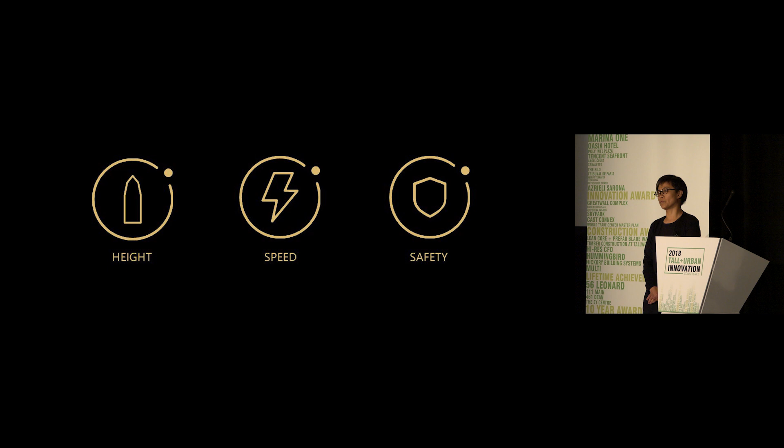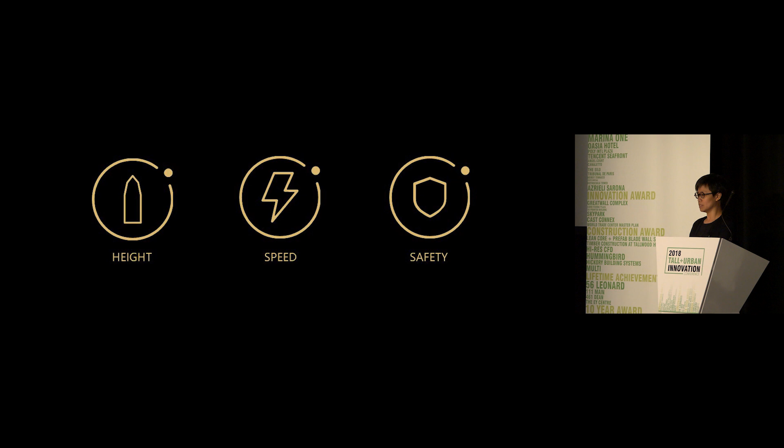Another one we would like to talk about is speed. There is this term called Shenzhen speed, which normally is associated with the economic development that happens in Shenzhen within the past 30 years. But in terms of speed here, we are also going to talk about some of the things we did to speed up the construction. And then the last one is safety.

This is the building that you are seeing today. In terms of speed, I would just want to say the speed we have talked about includes, for example, the mat foundations we are building. In fact, within 72 hours, we were able to pour in 32,000 cubic meters of concrete.

If you converted that into terracotta warriors, one of the figures in a Chinese historical tomb, that would be about 416,000 terracotta warriors worth of concrete volume.

And then lastly, in terms of speed, on average about every 4 minutes we were able to finish 1 square meter of curtain wall.

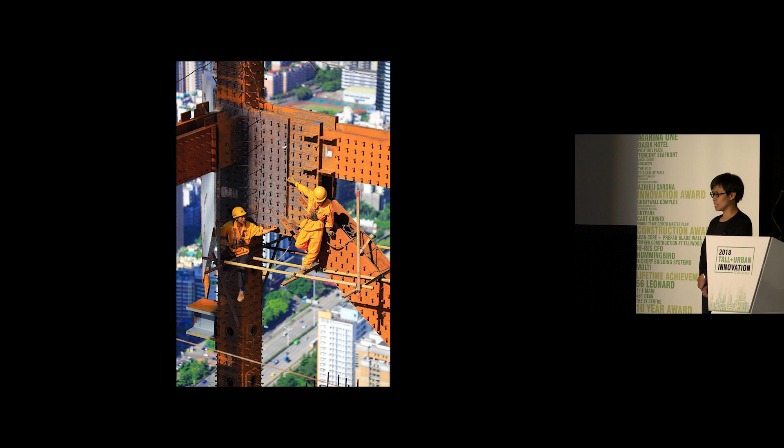Safety. A lot of people are involved in constructing a super high rise. If you go back to the history of skyscrapers, you can tell there have been a lot of fatal accidents, whether it was in the Empire State Building, the Sears Tower, or even Burj Khalifa. Fatal accidents involve human life.

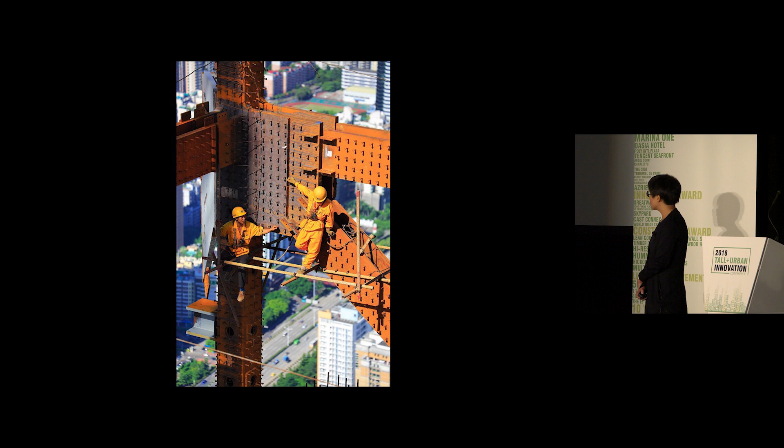At the peak of construction on the Ping An Finance Center, there were almost 3,000 workers working day in, day out on the site, day shift and night shift. But we are very proud to report we had 0 casualties over the period of a decade.

Before we start going into the details of the 3 points I just mentioned, I'll give you a summary background about the project. The project is located in Shenzhen. The site itself is 18,000 square meters, which is a very tight site for a building of this scale.

The total GFA is about 459,000 square meters. The tower itself is 599 meters in height, with a total of 115 floors above grade, and another 5 floors underground, below grade. That means we are digging into the ground to 29.5 meters.

The structure itself is a center core with 8 mega columns, diagonal mega braces, and 7 layers of belt trusses.

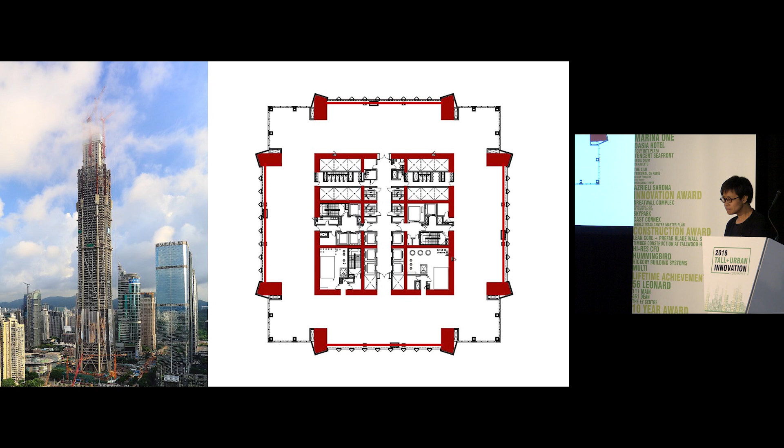And then it consists of 4 tower cranes, each about 100 tons.

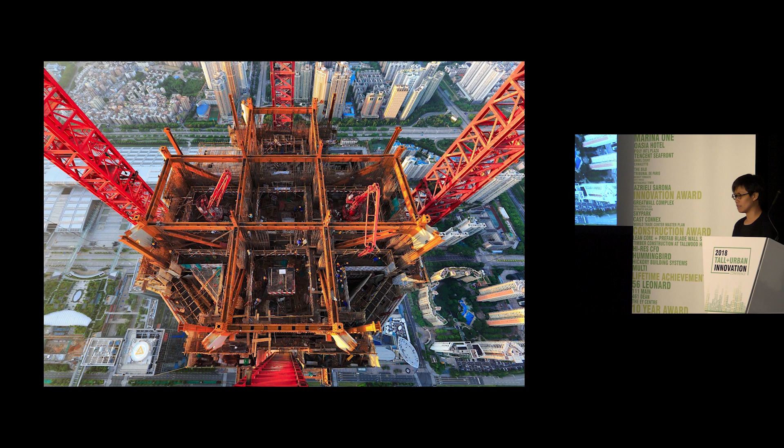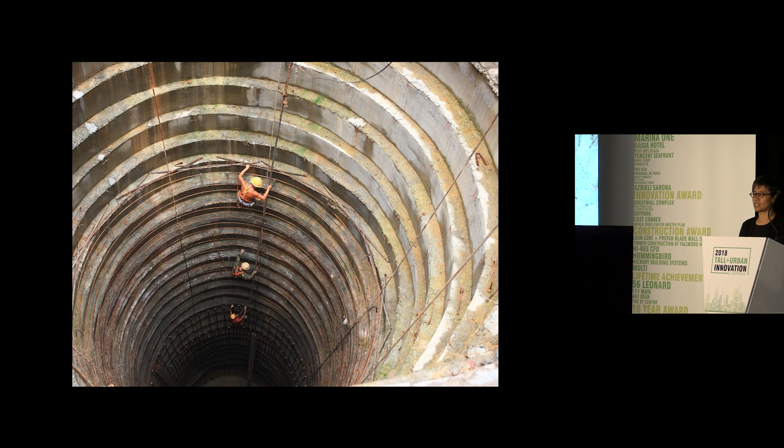Just now I was mentioning the basement itself is 29.5 meters deep. Indeed, the piles that go down further are another 35 meters deep of hand-dug caisson, which Mr. Weng is going to explain. And the diameter of the piles are 8 meters.

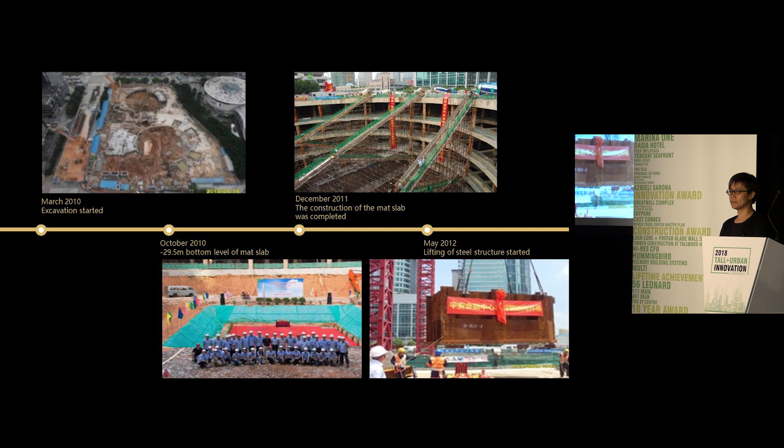Just a list of the milestones of what has happened. We started the project in 2008, and the excavation started in March 2010, followed by the mat slab foundation completed in December 2011.

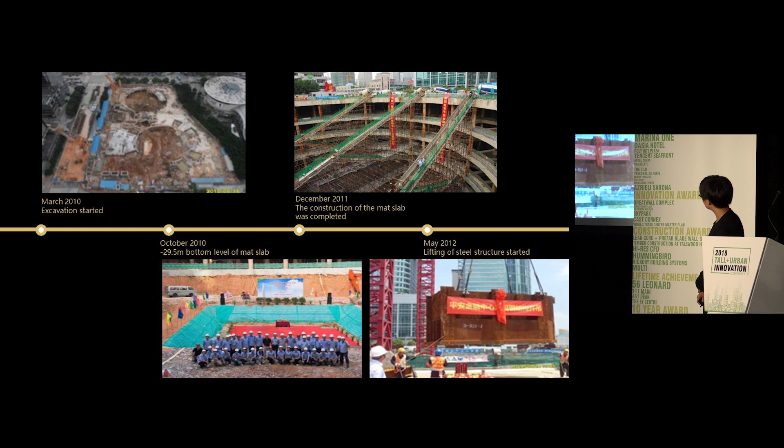2010 October, and then the steel will start building up above grade in 2012. This is a series of photos showing the sequence of where we are. The building has moved in for a year now.

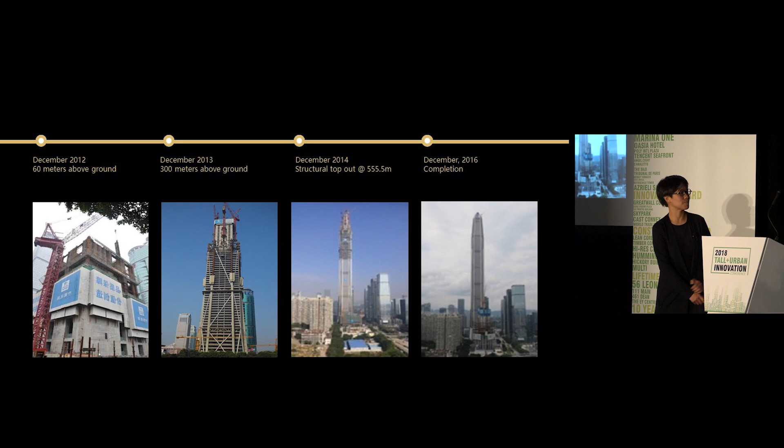So from here, I will pass the floor to Mr. Weng to explain the details of how we get the height, the speed, and also the safety.

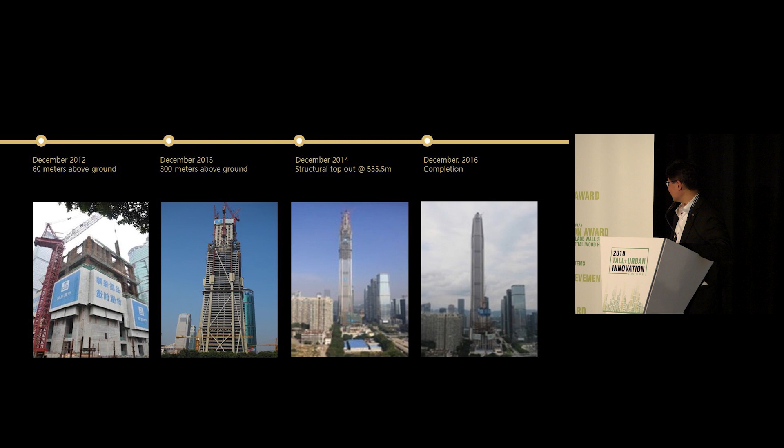The third one is safety. This section is the last, but not the least. I'm going to present the safety measures held in PAFC. Okay, let's go to the main body, otherwise it's not enough time to complete the presentation.

Height. What difficulty did we encounter from height? We know that the higher the building is, the deeper the foundation is required. The foundation was constructed between 30 meters and 60 meters below ground. So before the construction of foundation, we needed to build a protective enclosure.

The protective enclosure was a piling wall. The piling wall is common as a lateral supporting system. Its construction is also common. Why did we adjust the construction of the piling wall? It's not because of difficulty in construction, but the precaution to control its lateral deformation.

We are not talking about controlling the deformation to about 20 or 30 millimeters. We are talking about controlling the lateral deformation within 4 millimeters. Why? It is because we have one metro line and one high-speed railway adjacent to PAFC, as shown in the diagram. Both were existing.

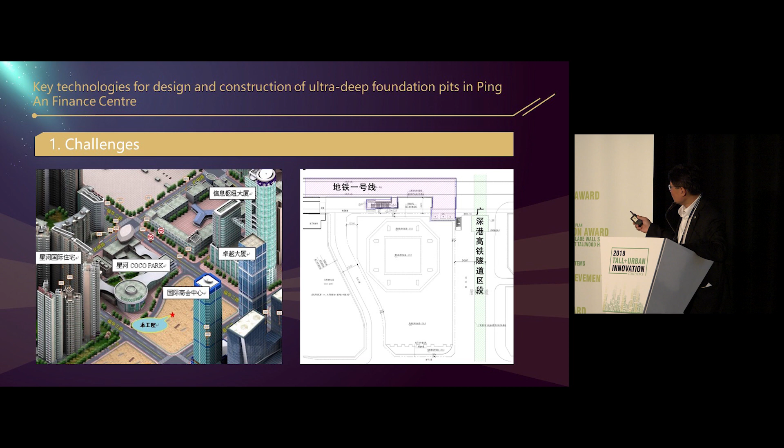One side was decided with a regular ring, the other side decided with a big opening, just like this one. Then we carried out numerical simulation to evaluate its deformation. We also carried out analysis on the pile-soil interface while soil was being removed.

Therefore, it was designed to construct bore piles with 5 layers of internal support and waterproof curtain for the northern side. The remaining sides were designed to construct bore piles with 4 layers of internal support, waterproof curtain, and 2 layers of soil anchors.

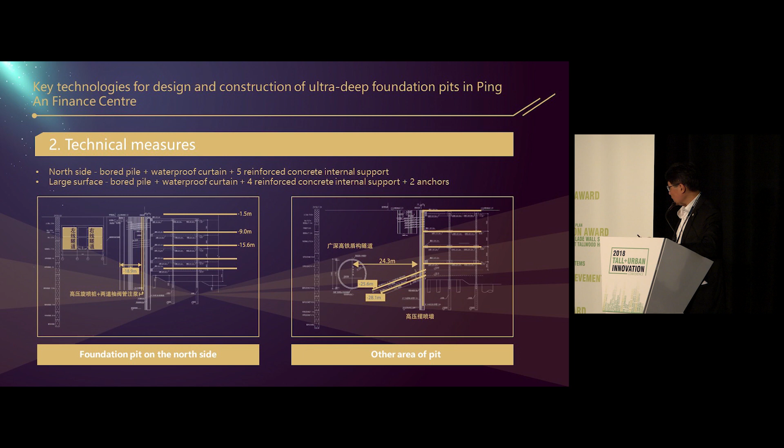This shows the construction stage of the internal support, and then what result we had: it ended up with a reduction of construction period by nearly 10%, and the lateral deformation was 2.5 millimeters, which was just 60% of the limitation mentioned before.

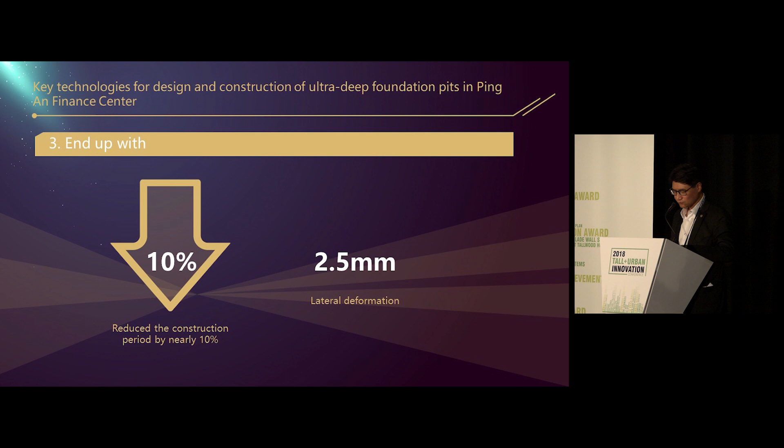Another difficulty induced from the height was hand-digging piles with a large diameter of 8 meters. We have eight numbers of 8-meter diameter piles. You can measure how big this is. Not many cases use as large a diameter as 8 meters for piles in building projects.

We prepared the piling holes by hand digging down to minus 25 meters. Then the blasting method was used to excavate the pile holes down to minus 30 meters, or even deeper to 35 meters.

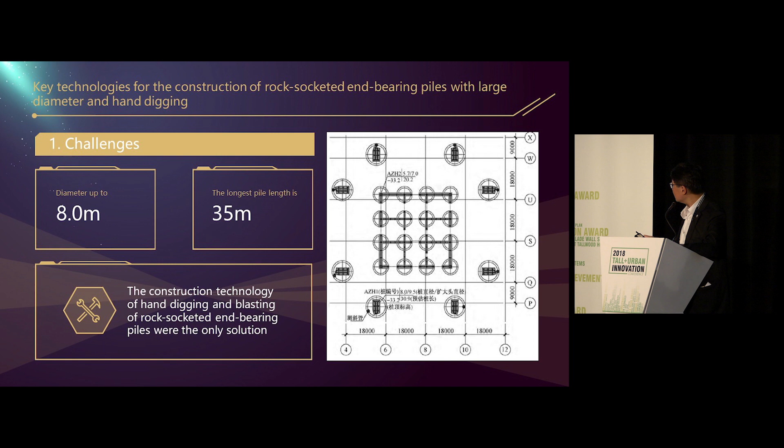In more detail, prior to excavation, it was required to stabilize the pile holes. Grouting was applied to the bedrock fissure, and then some mini piles were constructed around the casing of the hand-digging piles. Besides, it was pre-drilled before excavation, and then, as normal practice, it was excavated a further 1 meter per single day.

This picture shows each layer, 1 meter, 1 meter, 1 meter. At the end, some achievements were gained, as shown in this slide.

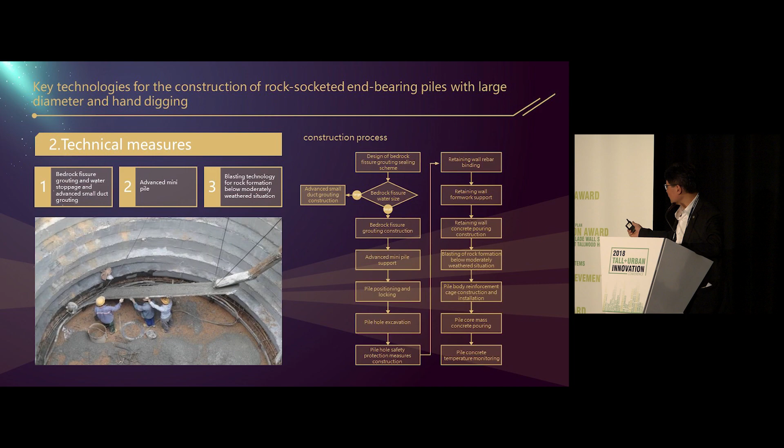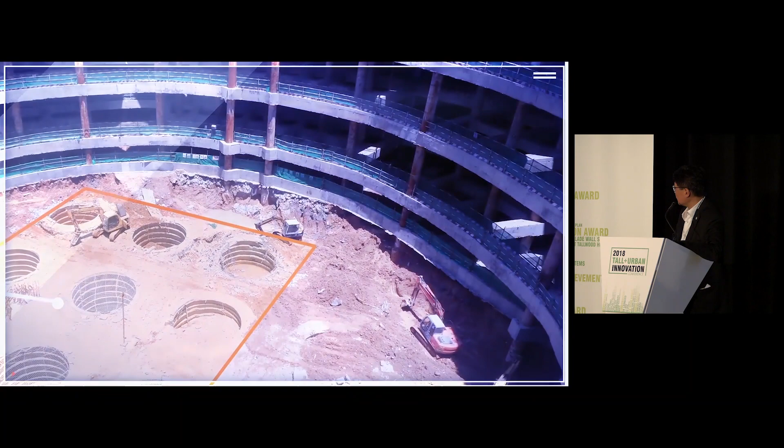This is a short video showing the excavation and the pile construction.

Another difficulty induced from the height was the construction of the mass slab. Its difficulty was because of the sizeable massive concreting technology.

Actually, what is the problem? The problem is thermal cracking, which would reduce structural integrity. So what do you think, if thermal cracks are induced everywhere in the mass slab, is it still safe?

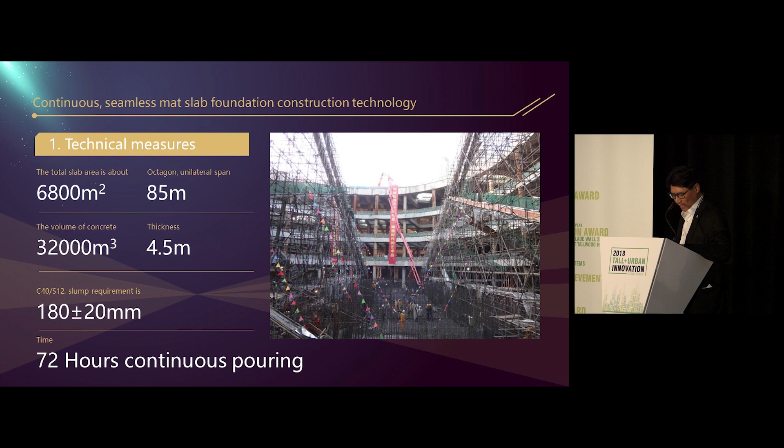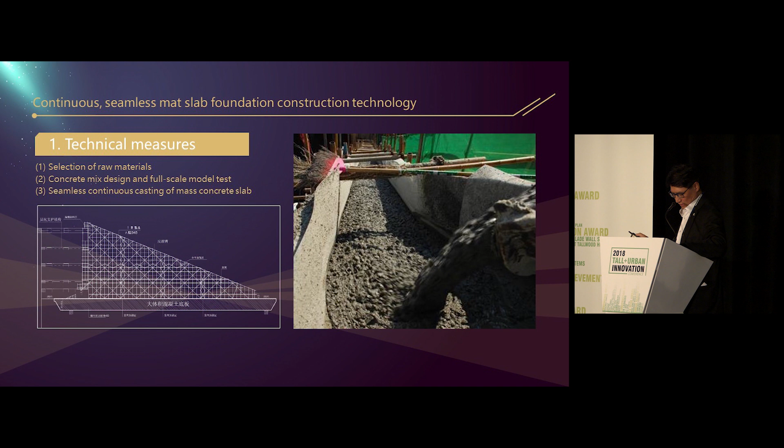At the end, the highest temperature was measured at 62.5 degrees Celsius.

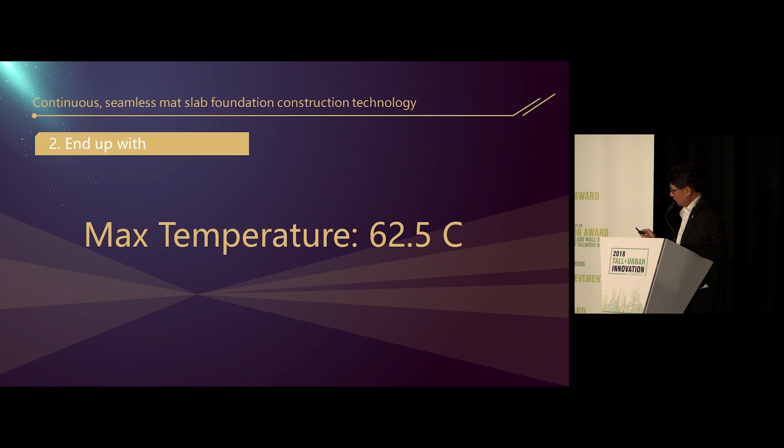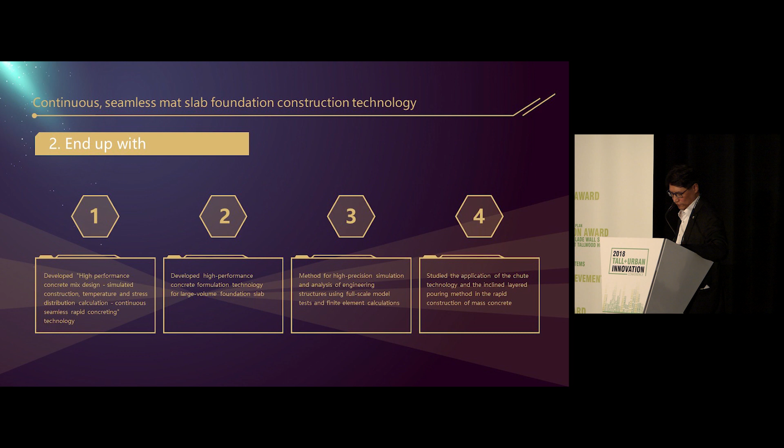Besides, some additional achievements were gained, including the development of the high-performance concrete design mix, especially for massive concreting. And then we talk about the speed.

In this point, I'm going to talk about our special structure. Since time is not enough, should I jump? This is the speed we are talking about: how to accelerate the construction speed by using the hydraulic climbing formwork system.

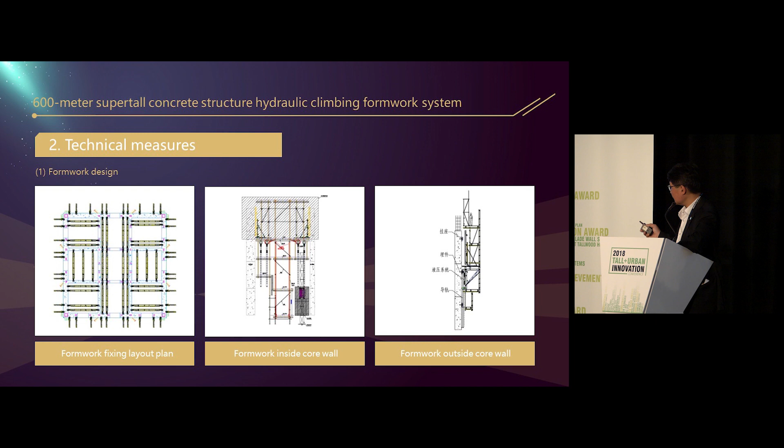This slide shows the design of the hydraulic climbing formwork system. During the design, we considered many factors, including adverse weather such as typhoons, and we need to consider the embedment in the core wall, because our core wall is complex and varies zone by zone. The core wall is actually a mega frame core wall outrigger truss lateral resistance system, so many embeds are required to fix before concreting.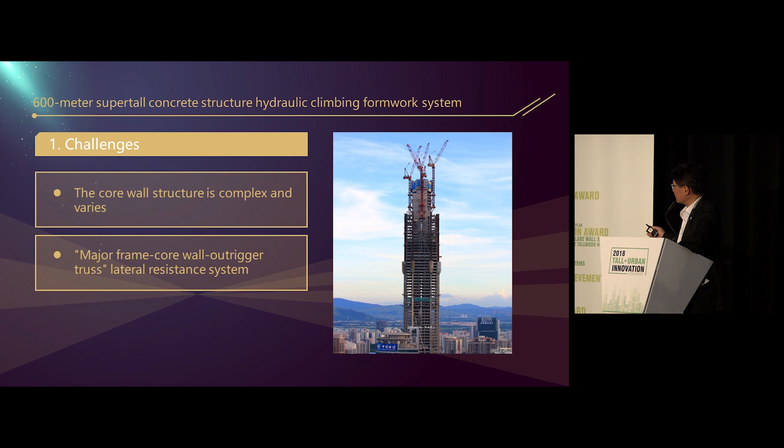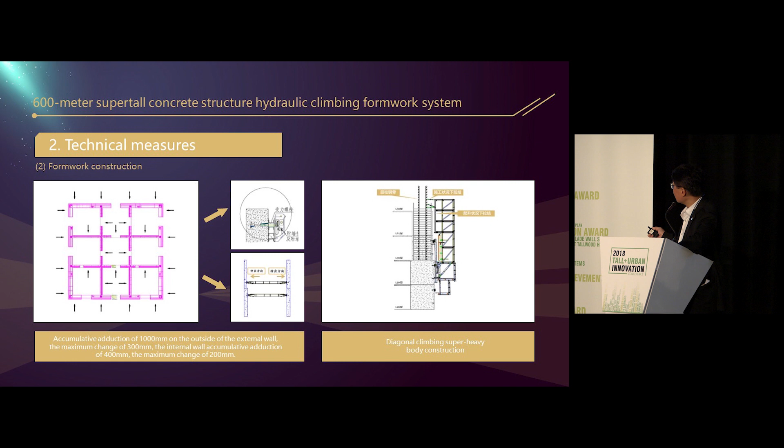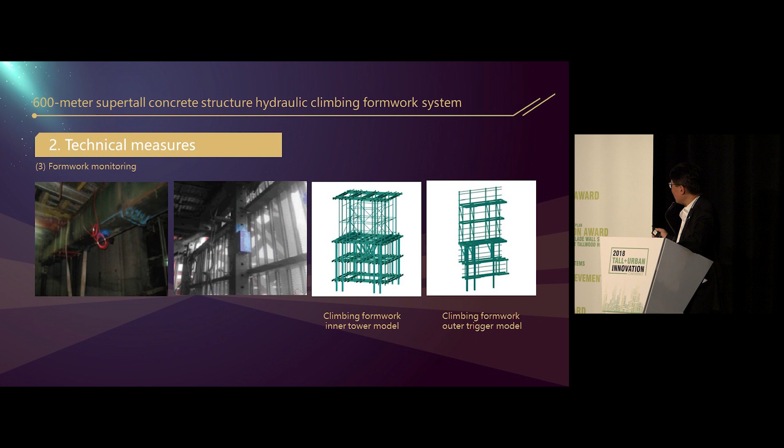This shows another diagram of the climbing formwork system, and this slide shows the in-situ fixing of the hydraulic climbing formwork. At the end, by using this system, the core wall was constructed at an average of 4 days per floor, and we achieved the highest speed at 2.5 days per floor.

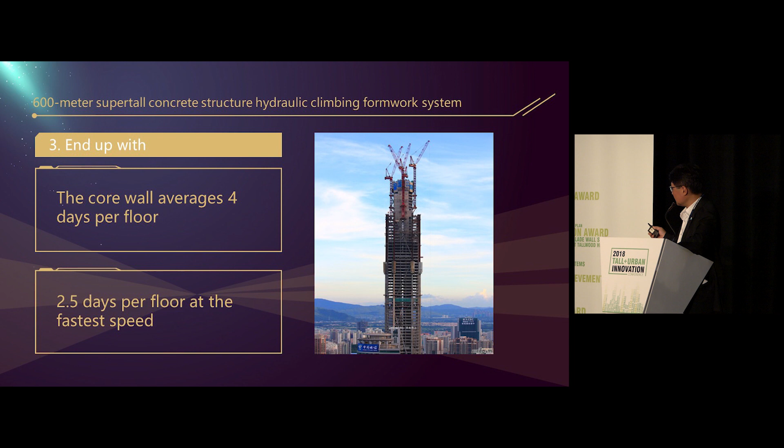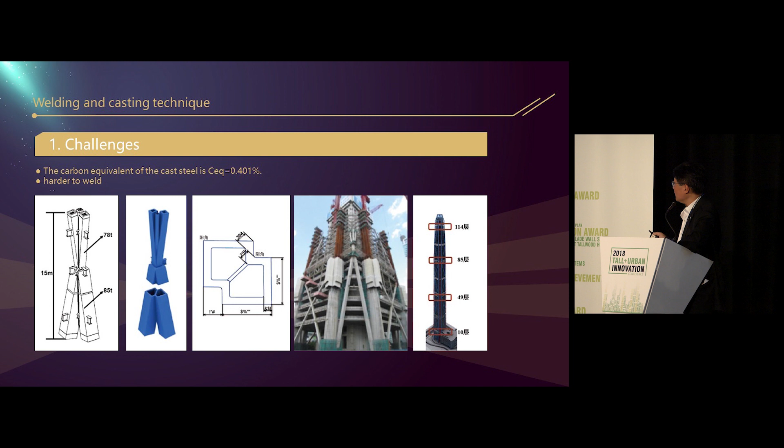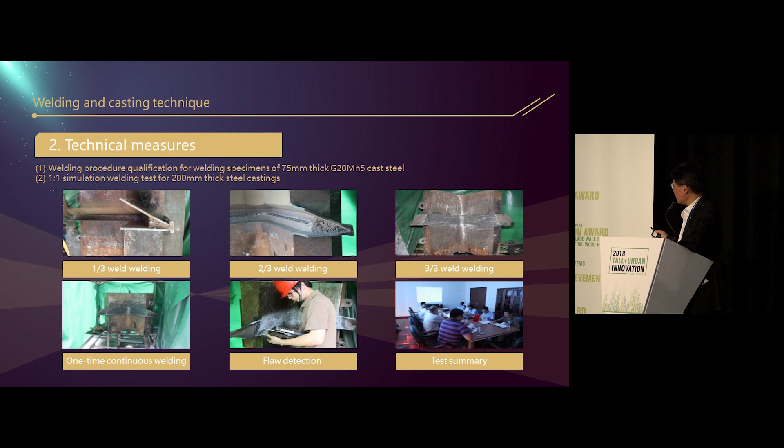This is another challenge. We used casting steel. Why do we need to talk about casting steel? Because it is quite hard to weld, and the thickness of the casting steel was over 200 millimeters, which is not really easy to control and to weld. Even the existing design code cannot tell us how to define the welding procedure and testing procedure.

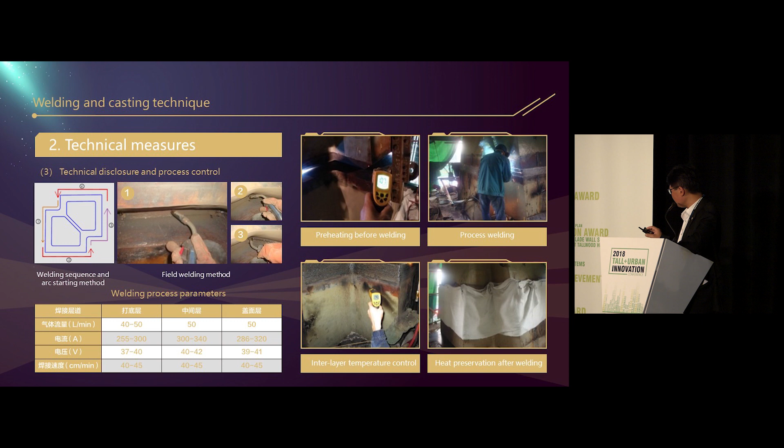So our contractor did one full-scale mock-up to test and verify the welding procedure and the testing procedure. At the end, we did the welding to the casting steel with 200 millimeter thickness, and the length of the weld was 7.5 meters, and it totally passed the first time.

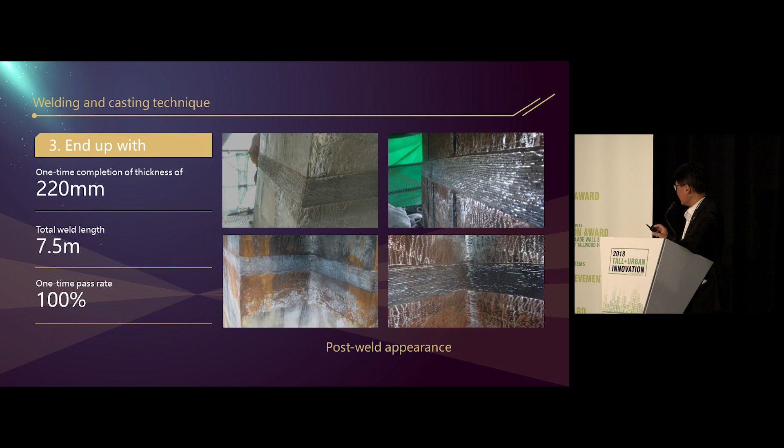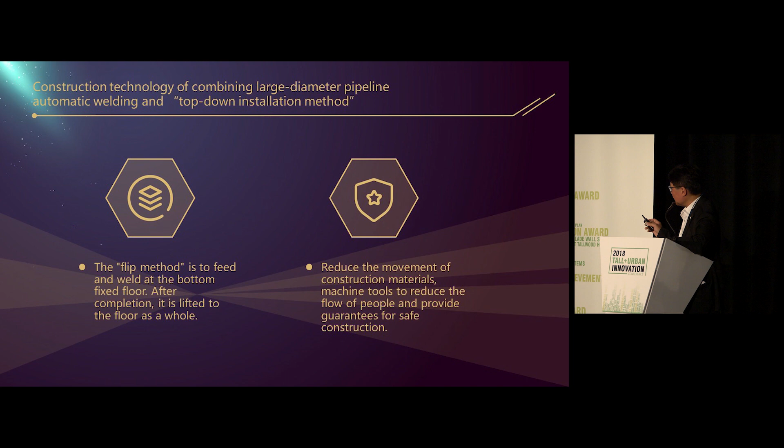This is another method to accelerate our construction, called the top-down installation method. What is the top-down installation method? I have a small video showing the top-down installation method.

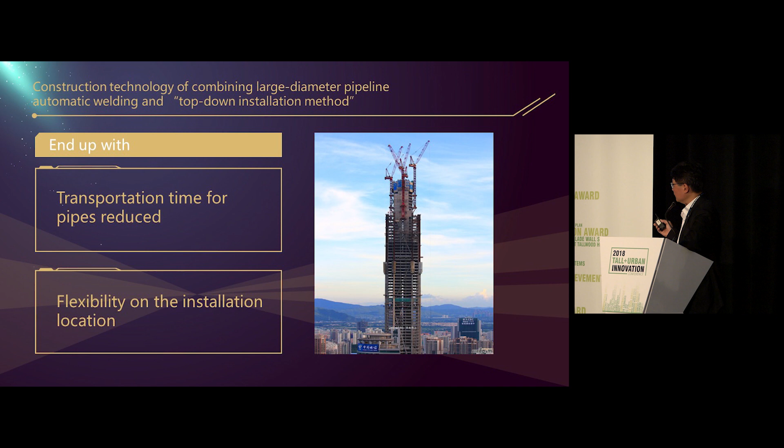This method actually saves our transportation time and allows flexibility in the installation location. What does that mean? Because we can choose a better condition location to fix the pipes.

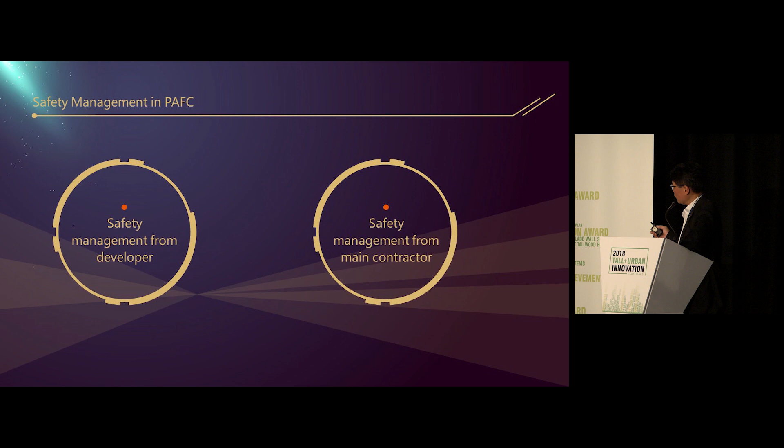Safety, this is the last section. I think I should jump to the end. Safety management in PAFC actually has two parts: one by our developer, one by the contractor.

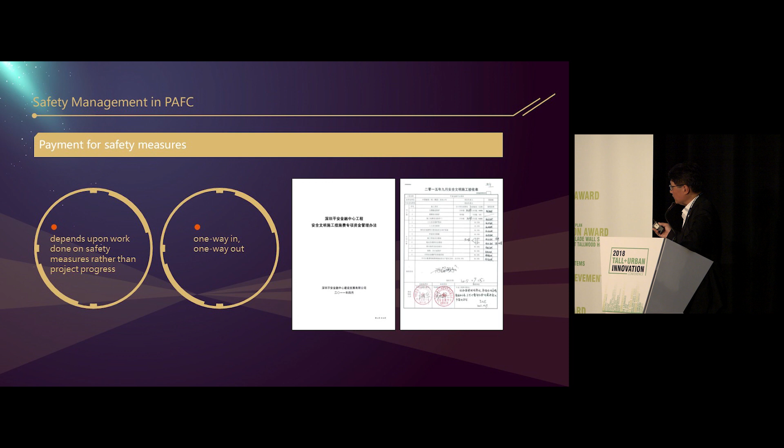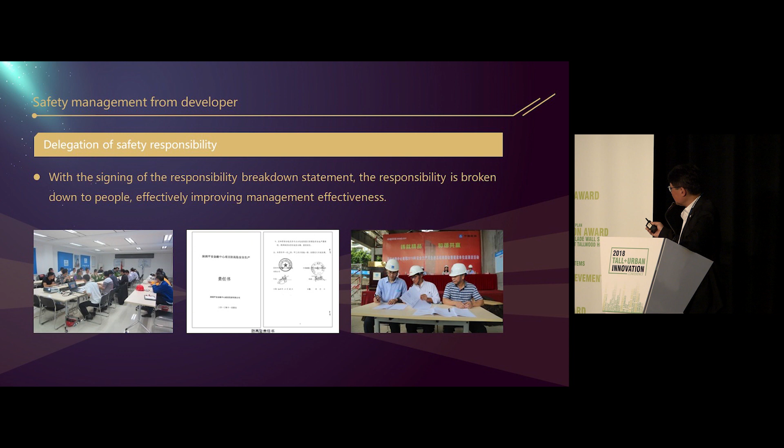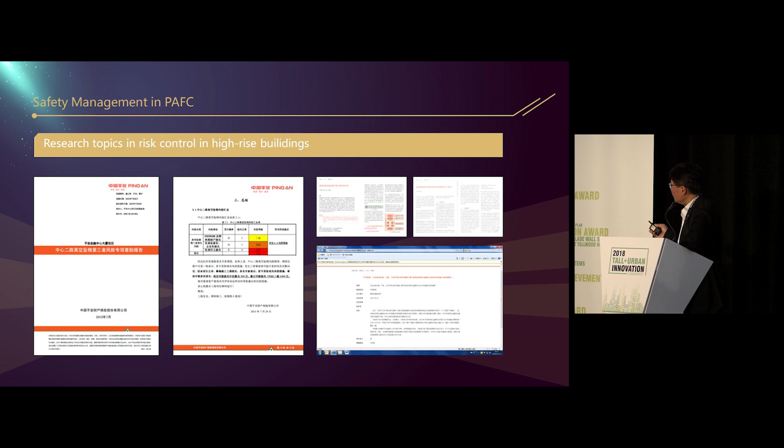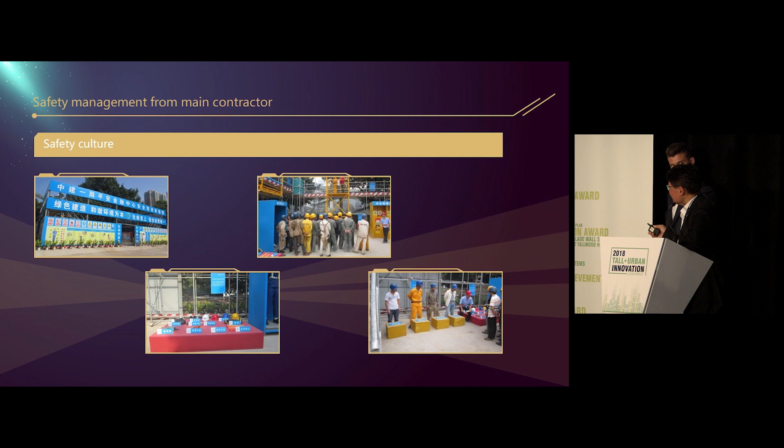And we did the delegation of safety responsibility to the main contractor and the supervising engineer. And we did some research so that we can use these results in the project, and also in other projects. And there was some standardization and promotion by the main contractor, along with building safety culture by the main contractor.

Finally, at the end, I'm proud to announce that our project achieved zero casualties. Thank you.